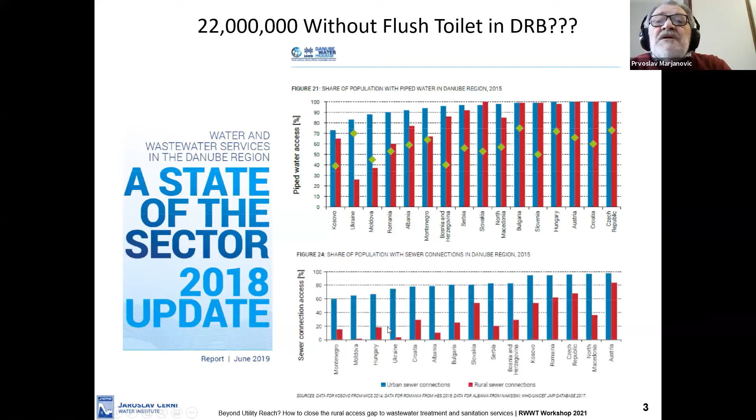That brings me to the second graph, which basically shows the disparity between urban and rural connections and really tells us where the gaps are in different countries with respect to rural population. And you see that in lower Danube countries, rural population is really lagging behind.

Anyway, this is a map of agglomerations by size in the Danube River Basin, and you see obviously that the majority of those that we could consider in the rural sector are in the range of 2,000 to 5,000 people, even though some of them may be urbanized slightly in the center of the communities and so on, but a large number of settlements or agglomerations could be classified as rural in character.

When I look at the latest available data on the percentage of generated load in agglomerations bigger than 2,000 inhabitants, population equivalents in the basin, which are not collected as per the Urban Wastewater Treatment Directive, they don't have sewerage systems. You see a striking difference between lower Danube countries and upper Danube countries.

More than 75% of these communities between 2,000 and 5,000 people are typically not connected to sewerage systems. Not to speak about agglomerations and settlements smaller than 2,000 people.

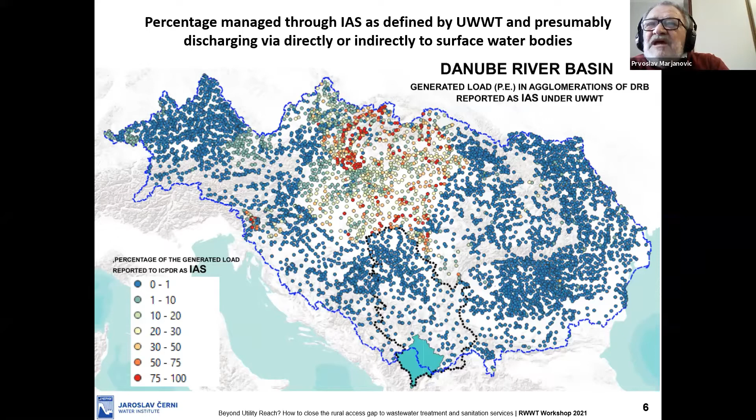If I look at the generated load in agglomerations which are reported as individual and appropriate systems, and the percentage of the generated load connected to those, again, you see that there are some differences, especially between Hungary and Slovakia. And I think probably the reason for these differences is in the way the individual systems are reported. I have a suspicion that some of the septic tanks are reported as IASs rather than as proper treatment individual systems.

If I look at unconnected or uncollected and IASs, you see the boundary, or the old Iron Curtain, if you want to use the analogy. And that's really the level of the development. And it's striking how big the problem is. So all these unconnected and IASs can be considered as individual systems to a large extent.

So the task to implement the directive, remember these are agglomerations bigger than 2,000, is enormous if we are going to connect all these people across the lower Danube.

If I now look at agglomerations bigger than 2,000, and the percentage of IASs which are discharging to soil rather than to the sewer system or the treatment plant by tracking the emptying of the systems to the appropriate treatment plant, you see again there is a large proportion of those communities, especially in the middle region, in Hungary, Serbia, Bosnia, Croatia, Moldavia, parts of Romania, which are actually discharging into the soil.

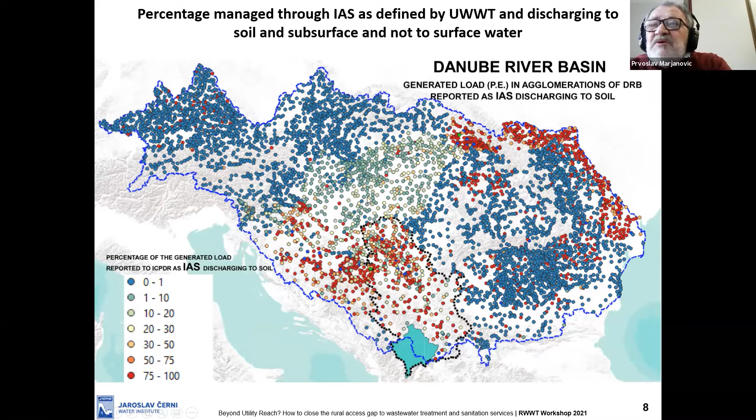Now, soil as a recipient of treated or untreated wastewater is not recognized by the Water Framework Directive or the Urban Wastewater Directive, which I think is a major problem. That again is pushing us in the direction of having to connect all these people to centralized systems or to discharge the wastewater into the water streams rather than avoiding it. If we do that, I think the impacts on the environment are going to be much bigger on the status of water than they are currently.

If I focus on Serbia, this is the distribution of settlements, not agglomerations, in the different size classes. And you see again that less than 2,000 is the majority, which we understand. 2,000 to 5,000 is a significant number. The rest is manageable easily by centralized systems, 5 to 10,000, 10 to 50, and so on. In Serbia, we have delineated 398 agglomerations, taking care of some 745 settlements bigger than 2,000.

Now, the major problem we have, as Konstantin mentioned yesterday, is depopulation. And if you look at the trend of the population in different class sizes, you see that the communities less than 5,000 people are all on a serious decline rate.

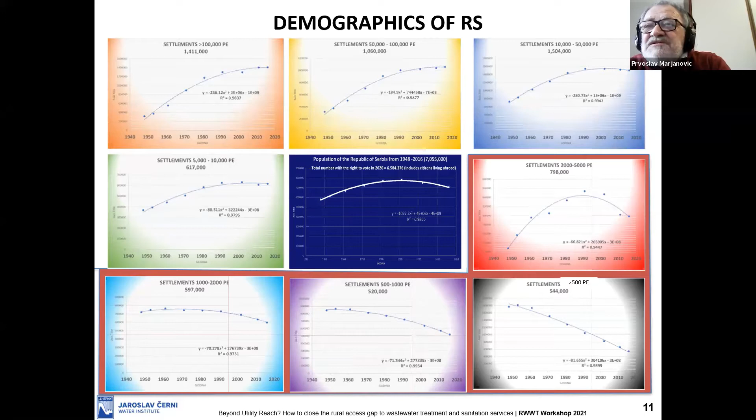The national population seems to be stabilizing or at the beginning of a declining trend in communities bigger than 5,000 people. So there is no question for those to go to centralized systems, but for those from 5,000 down, I would be very reluctant to go and design collective systems which will not serve the people who are disappearing in those communities.

When I look at what percentage of population in Serbia lives in different size classes, I see that the biggest chunk of people lives in communities between 10 and 50,000. But I also see that the percentage of population living in communities smaller than 5,000 is close to 40% of the total population. So we're talking about some 3.5 million people.

If I take Serbia as an example and look at the percentage of people in different settlements, not in agglomerations of different sizes, which are served by individual sewerage systems, and I include in individual systems even septic tanks and pit latrines, we're fully aware that they are not adequate treatment. You see that 95% or more on individual systems covers a large territory of Serbia and thousands of communities.

Now, when I look at the character of those communities, I see that the communities of less than 2,000 are typically rural. There are approximately 600,000 individual systems serving those rural communities. Mixed systems, those are 2,000 to 5,000 people, approximately 205,000 individual systems in place, and 325,000 individual systems in place in urban and peri-urban settlements, those bigger than 5,000 people.

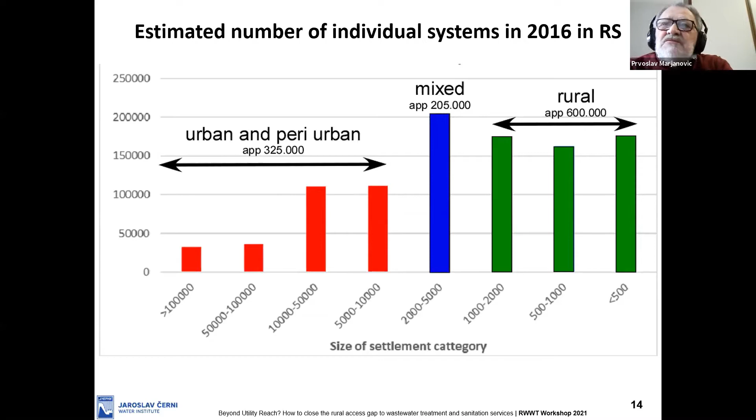Those in red should probably continue; we should push them to connect to the centralized wastewater treatment system, unless you give some exceptions for the outskirts of the cities. The blue and the greens, I think, do not merit collection systems and central wastewater treatment plants in my mind.

When I look at the current planning in Serbia, we are planning according to the detailed implementation plan for the Urban Wastewater Treatment Directive some 2.3 billion for construction of new sewers. That's assuming that everybody will be connected to the central system. 92% of investment in the network is for new sewer systems.

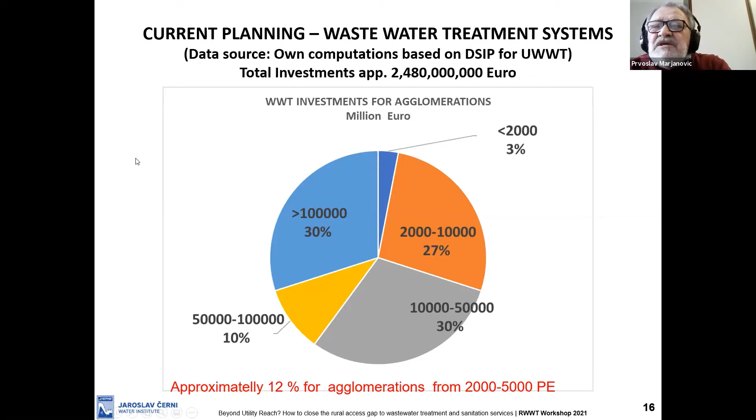If I look at wastewater treatment itself, I see that some 30% goes into medium-sized communities, the bigger proportion of the population. Some 30% goes to communities bigger than 100,000, but 27% goes into communities between 2,000 and 10,000 people, of which, when you split it for less than 5,000, you see about 12% of the investment going to wastewater treatment in communities of less than 5,000 people, assuming they all get connected to the sewer system.

Now, for the sake of the argument, I'm going to assume that we're going to stop building any new sewer systems, and all those that are not connected currently will go into individual systems in communities smaller than 5,000. And if I look at the potential for savings, the red ones will definitely stay centralized. The 5 to 10,000 will also largely stay centralized. The others will go to individual systems under that assumption, giving us a figure of about 1 million individual systems to be installed for the total population of Serbia, including those in settlements of more than 2,000 people, not only in agglomerations.

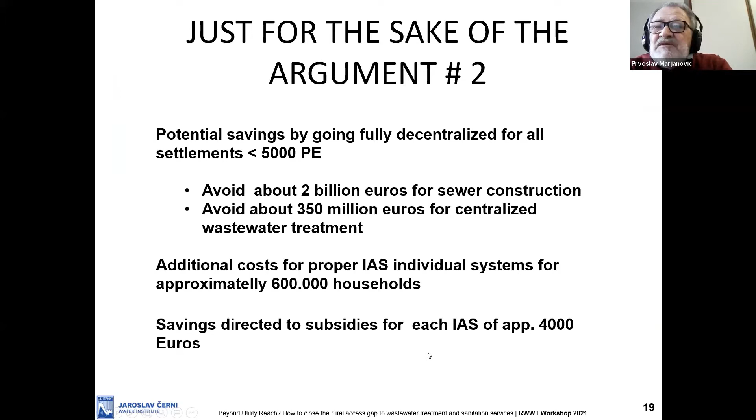Also, for the sake of the argument, if I assume those figures, then it's possible to save around 2 billion euros on the construction of new sewers and some 350 million euros for centralized wastewater treatment. These savings would allow us to consider subsidies for some 600,000 households at the level of approximately 4,000 euros per system to supplement the investment of the households in constructing proper and appropriate individual systems in those areas.

Is it feasible? According to the data we have insight into, absolutely. Typical costs in Belgium for an activated sludge plant or an equivalent do not exceed 1,000 euros per population equivalent. So for an average household of four people, you're talking about 4,000 euros to install an on-site treatment facility and discharge the treated water to soil without discharging to sewers. Similar costs in the United States are also documented and well prescribed.

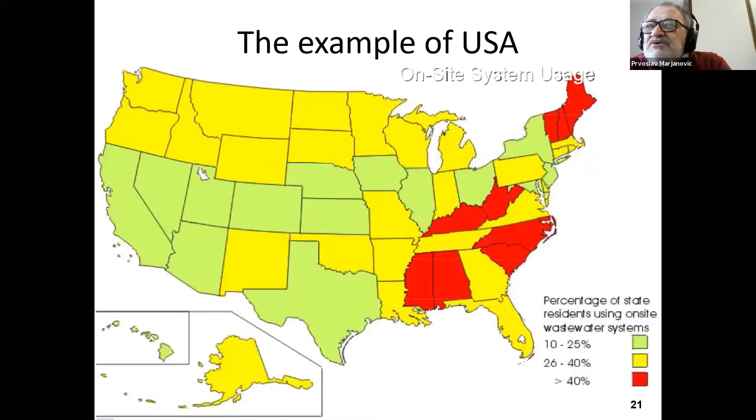If you look at the United States itself, and I would also urge people to consider the experience of Ireland, you see that the developed East Coast has many states with a large proportion on individual systems. If it's feasible for them, I don't see why it's not feasible for the lower Danube Basin.

And in closing remarks, I want to state that detailed analyses are obviously needed on all costs and benefits. There are many additional advantages which are possible and realistic by going with individual systems in smaller communities and rural communities especially, such as flexibility and mobilization of additional funding from the individual houses, because the subsidy program will not fund 100%. You can attract additional funds from the households to invest in their property. You can create a whole new industry for installing and maintaining those, create jobs, and so on. You just have to develop proper management models to do that.

The main problem is really not the technology, and I'm sure this will be addressed in the next session. The problem is really in the management of those systems, like Konstantin mentioned, that they don't have the capacity to manage these small systems. The problem of management is something to be considered very seriously, and different models for management are possible and can be considered.

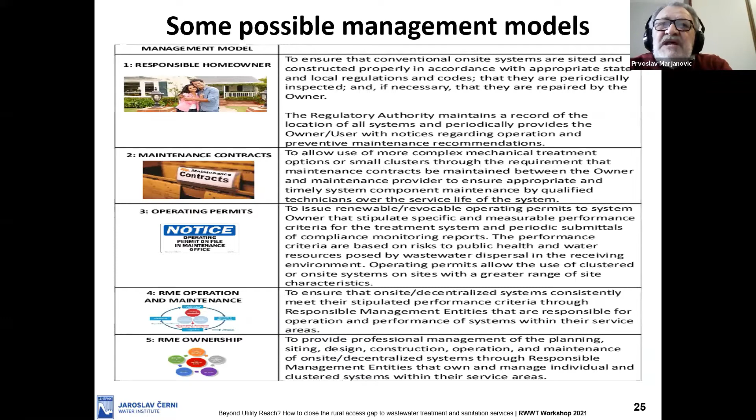The different management models that have been used in different places are varied, and I just mention 5 here from the United States. These different management models have different role players, from regulatory authority, service provider, owner, user, all the way to a responsible management entity, if you create such an agency in your country. The role of each particular role player in different phases of implementation of individual systems is clearly documented and can be implemented.

I think the requisite for this is an enabling legal framework from the EU and national governments, which I believe is currently not the case, even though Ireland has gone a long way toward providing this. People are advised to look at the case study of Ireland, especially in light of the court case they lost against the EU, and their subsequent changes to the Water Services Act, which now make it possible.

It's time to start thinking with an open mind and stop ignoring the potential of individual and appropriate systems because of difficult management issues that can be easily resolved. It's time to get soil recognized as a primary recipient of treated wastewater, and I think it's very pertinent and applicable to the Danube River Basin, especially the lower Danube, for communities and agglomerations smaller than 5,000 equivalents.

The real problem is that our experience with on-site treatment in the past has been bad. That doesn't mean the future has to be the same. Sewers are not really the sign of a modern civilization. Sometimes we have to question those approaches seriously.

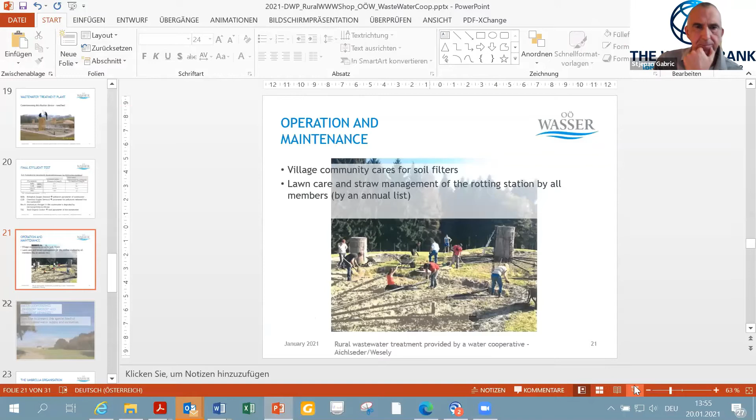Ladies and gentlemen, Stjepan, thank you very much for your introduction. I start my presentation. Just a moment, please.

So, yes, I talk about a report about rural wastewater treatment provided by a cooperative in Upper Austria. I made the presentation with the chairlady of the cooperative Dingdorf, Hermine Wesely.

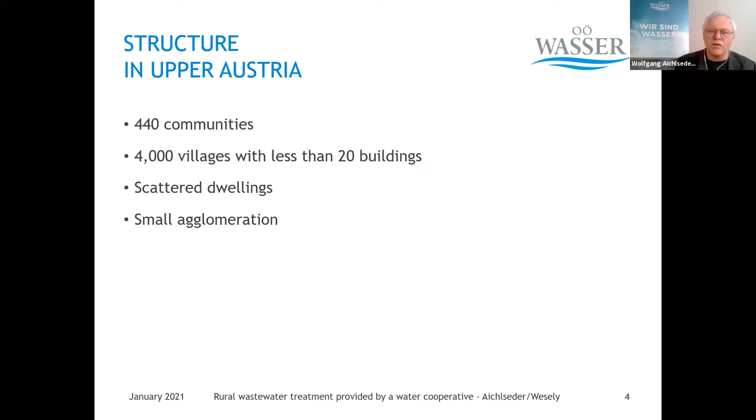Upper Austria, a state of the Republic of Austria, is in the northwestern part. We have a hilly region, and in the south we have mountains with narrow valleys. The structure is that we have 440 communities, but more than 4,000 villages with less than 20 dwellings. So we are a scattered and small agglomeration.

One of the solutions we support are water cooperatives. Water cooperatives are the user, owner, and responsible persons, and their principles are public cooperations referred to the Austrian law. They are also controlled by the authority, the local authority. They are self-determined and have personal responsibility for their organization.

One of the principles is also cost covering. The organization is such that all members have to pay to the costs. Water cooperatives, like communities, are financed by connection fees, basic charge and consumption charge for the operation. They also have the possibility to get subsidies from the state and from the Republic, and also credits and loans.

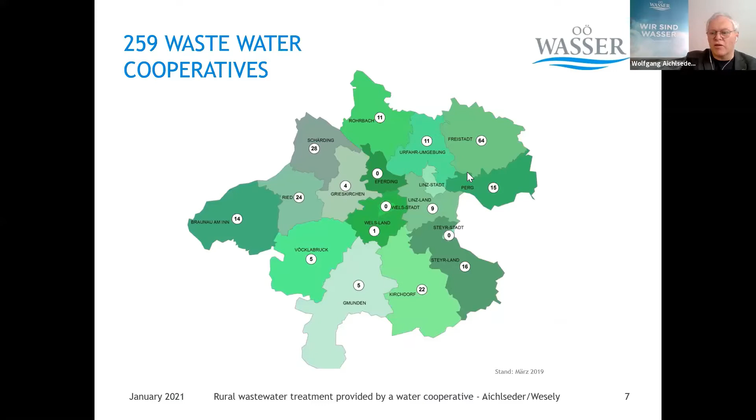In Upper Austria now we have about 260 cooperatives in the regions, and I think in all regions we have it, but most in the hilly side of the northern part of Upper Austria. The member structure is that small villages, up to 10 or up to 30 households, are a topic to organize cooperatives for wastewater management.

In Austria, we have more than 3,400 water cooperatives, but they also deal with water supply, irrigation, flood control and melioration. For me, it's a solution predominant in rural areas, in small villages, where they can get an organization with inhabitants from the village.

I'll show you an example, the water cooperative from Dingdorf, from the founding to the planning, designing, constructing, and operating a small sewage and wastewater treatment plant.

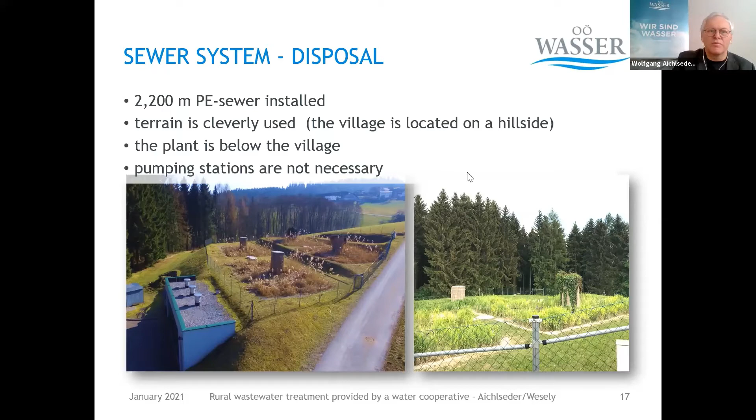The wastewater treatment plant was not a package plant, it was a reed bed filter system, first with a rotting station with straw, and then the wastewater comes to the reed bed filters, and after an inspection shaft, the effluent disposal goes to a small river, to a ditch.

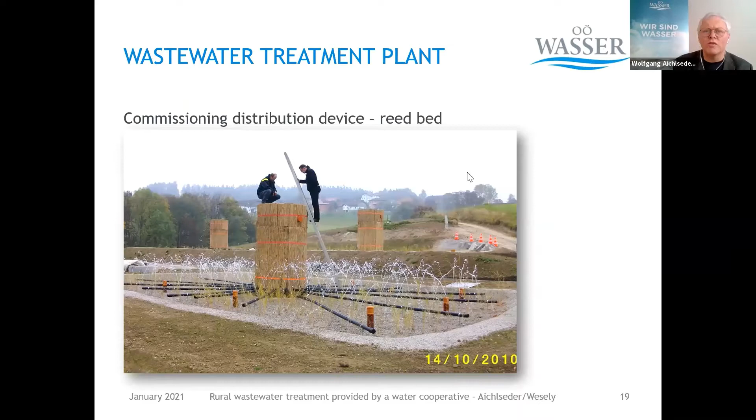Here you see a photo from controlling the distribution devices during the construction.

A cooperative belongs to their members, though the community of the village cares to operate the wastewater plant. They have an annual list, so straw management for the rotting stations is provided by the members. They also have a field to dispose of the rotting material, and now after 10 years of operation, there is enough place to dispose of the straw.

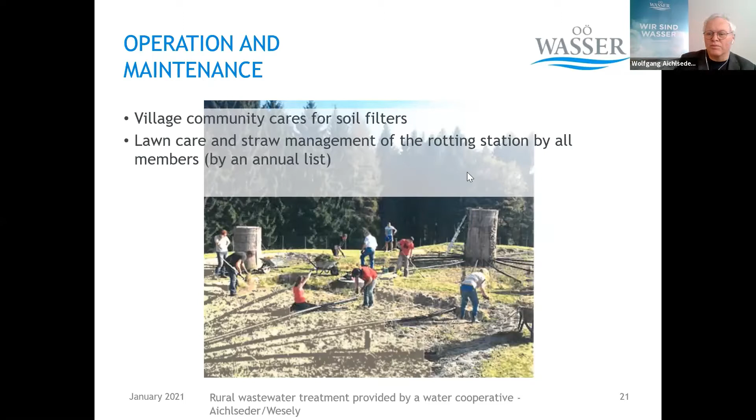The water cooperative was consulted by the umbrella organization, Upper Austrian Water. This organization was founded in 1946, a long time ago, by a resolution of the Upper Austrian Parliament. The general manager and office are financed by the Upper Austrian government. The main objectives are team working, speaking with one voice, pooling ideas from the members, and supporting interesting village foundations.

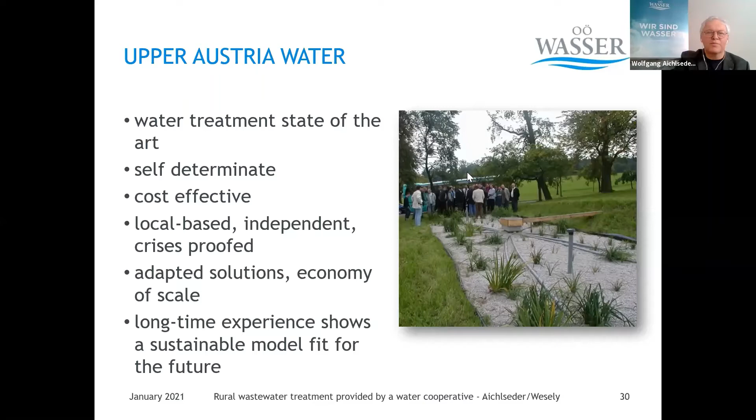Thank you, Wolfgang. Maybe a quick question before we move further: how unique is this form of association cooperative for Austria? Does it only exist in Upper Austria, this kind of umbrella organization, or does a similar organization exist in other parts of Austria?

Cooperatives exist in every part of Austria, mainly in Upper Austria, Salzburg for water supply, but also for wastewater in Styria. Umbrella organizations are in Salzburg and also in Styria and Burgenland. Nowadays there is discussion, and I'm consulting in Carinthia. We also have models in Ireland, Spain, Denmark, and Finland.

Our Upper Austrian model is copied in Uganda. In Uganda, they have 6 umbrella organizations for the whole country, and there, for example, they handle both water supply and sanitation together. The model is that the villages make both together.

Thank you. I think it's actually a very good model that could be replicated in many other parts of the region, not fully utilized. I would definitely advise people to explore it further on their own. We also have a possibility to ask additional questions during the Q&A session after the presentation.

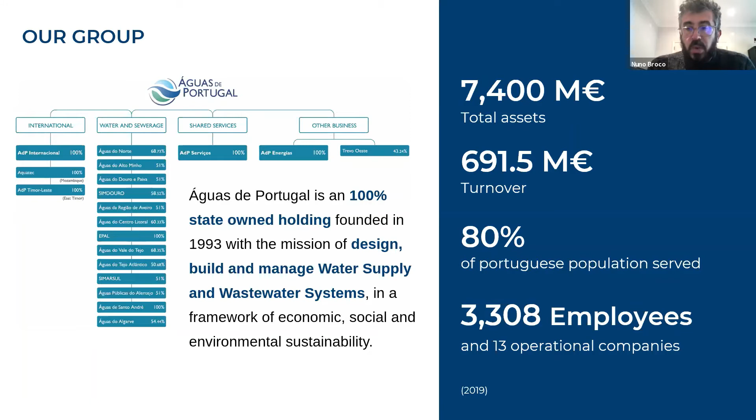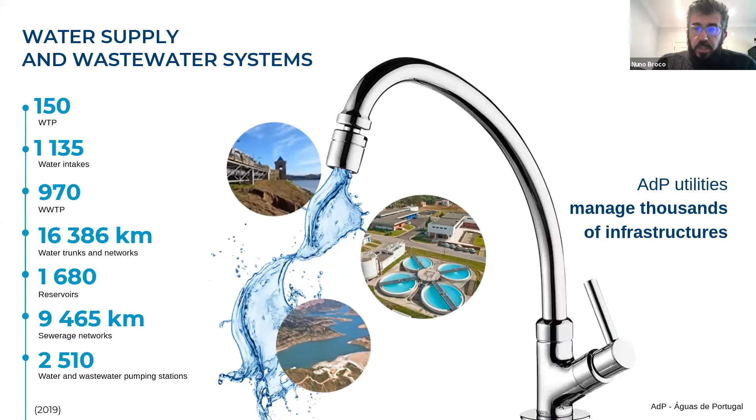And we serve around 80% of the national population. The remaining part is served by other operators that we have in Portugal, and we employ around 3,000 employees at this moment. We manage a huge number of assets, water and wastewater, mainly on the bulk part of the system. So the retail part of the water system is the responsibility of the municipalities for most of the areas where we are.

Like I told you before, we are a small country, only 10 million inhabitants, but the biggest part of our population is focused on the coastal area, and the other part, the rural area, is in the countryside. So we have a big challenge in terms of management of our assets. We have big plants in the coastal area and very, very small plants in the inland part of the country.

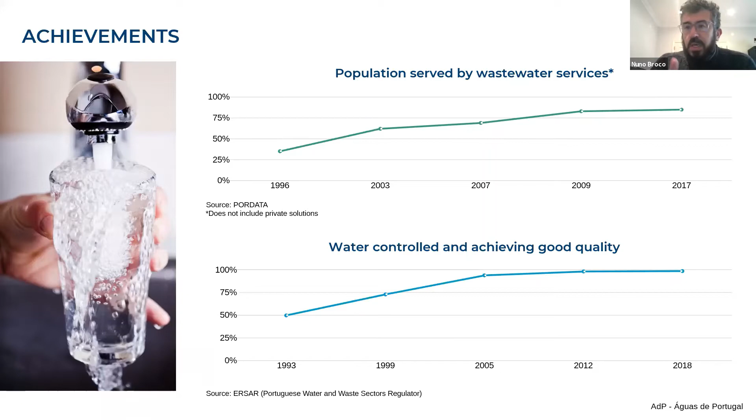During these 25 years, we have achieved important results in terms of sanitation and also in terms of safe water. And just to tell you that, although we have in the top graphic that only 80-something% of the population is served by wastewater service, this means central wastewater service. Some private solutions are not included in this graphic. So at this moment, Portugal has a coverage of service around 90-something%.

Well, how did we get here? It's important to share with you our story from the last 25 years. 25 years ago, Portugal had a very, very poor service in terms of wastewater and water supply. This service was under the responsibility of the municipalities. We have a very important number of small municipalities, and they are small, and there is some lack of capacity in their operations. So 25 years ago, only 15% of our wastewater was treated in proper wastewater systems.

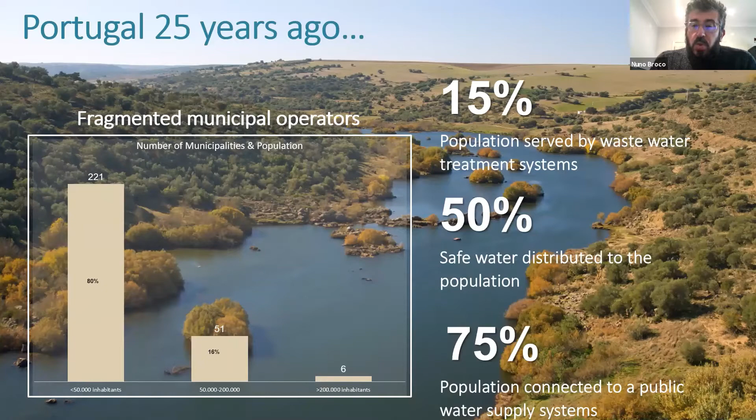Only 50% of the water distributed was safe, and only 75% of the population was connected to water supply systems. So at that moment, this was the big picture for the water sector in Portugal, with a huge infrastructure gap, low performance, low quality of service, very inefficient, with a talent deficit that was one of the major reasons for that, and that was not sustainable.

We had at that moment an exception, that was EPAL. It was the operator for the Lisbon area, for a set of municipalities around Lisbon. It was a very, very old company with more than 100 years. And that was the exception, and the Portuguese government took the decision in 1993 to use that example to create a new company, Águas de Portugal, and an institutional reform was needed to do that.

So at that moment, with Águas de Portugal, a new concept was created: multi-municipal systems. These were partnerships between the central government and the municipalities, public partnerships that operate with a concession contract. This contract includes a capital investment plan. We operate under a full cost recovery model, and we have a very, very powerful regulator at this moment in Portugal that regulates all these operations. So this was the framework in 1993.

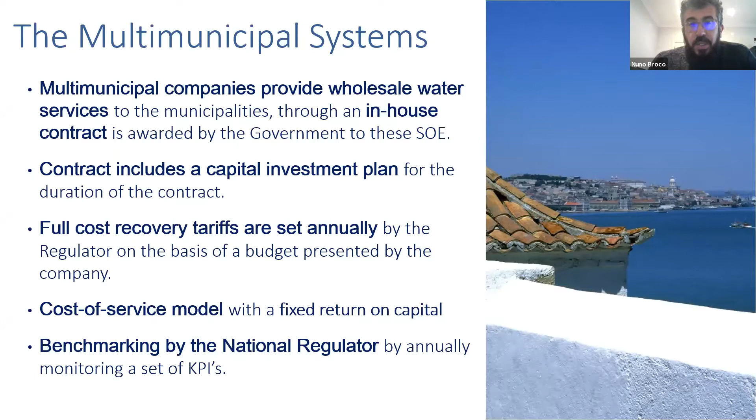At that moment, we focused our main attention on the coastal area. So we dedicated our investment plans to this first generation of multi-municipal systems, we created a set of new infrastructures, and we increased a lot the quality of service in this coastal area. The results that we achieved at the end of 1999 were very, very good, and the Portuguese government took the decision at that moment to expand this concept to other regions of the country.

So now we arrive at the main topic of this workshop. That was what we call the second generation of multi-municipal systems. But at that moment, some decisions were very important, because the model that we applied to the coastal area was not possible to apply to the inland part of the country, because we had a very low population density inland, low income from that population. The population was very old. Some desertification process was going on in the inland part of the country. We had a decreasing demography, and the topography of the inland part of the country was very different from the coastal area.

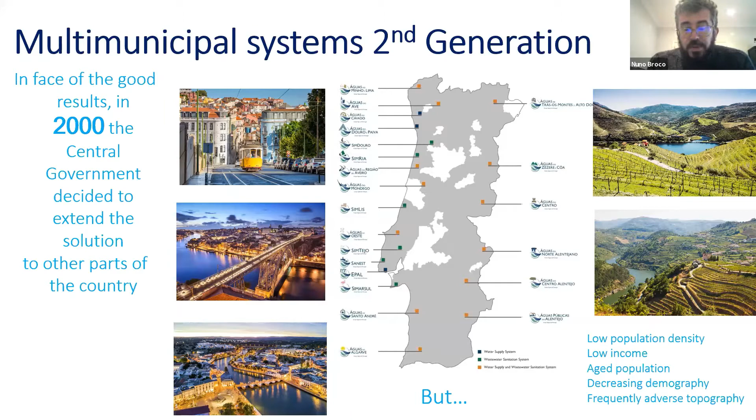So a different approach was needed to this second generation of multi-municipal systems. So at the moment, the main question was how to close the rural access gap to wastewater treatment and sanitation service. Like I told you, with a very difficult topography in the inland part of the country, we found out that we need to build around 500 wastewater treatment plants in this part of the country.

The largest part of them were below 2,000 inhabitants. These 500 wastewater treatment plants only serve around 6% of the national population and represent around 20% of our global investment. So this was a huge challenge at that moment.

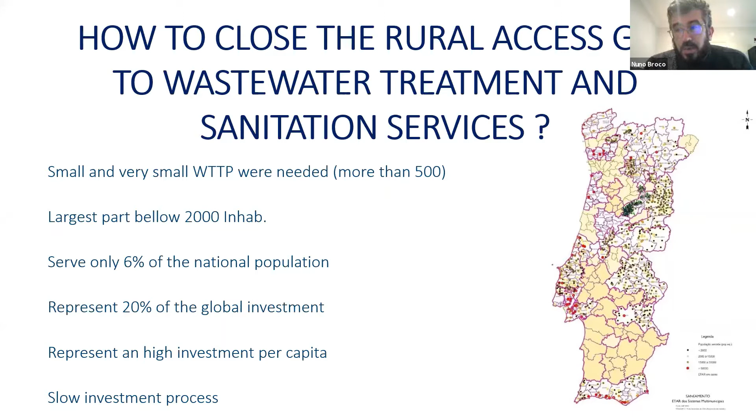In this picture, you can see these numbers, and like I told you before, the total number of wastewater treatment plants that we have below 2,000 inhabitants is around 70% of our total number. But we only serve around 6% of the national population with that, and this brings us to the investment per capita that is very, very high when compared with large wastewater treatment plants.

So that was the issue at the moment, and we had some goals in terms of the investment plan. We had the goal to make a standardization of these wastewater treatment plants, mainly because we wanted to minimize the project and tendering time. We knew at that moment that CapEx and OpEx optimization were crucial for the success of these operations. And of course, we had the full compliance of legal discharge limits. And one of the concerns was the operation of this huge number of systems.

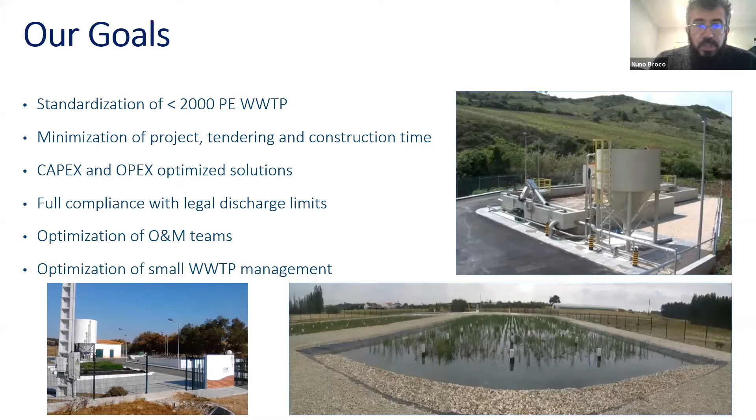So our approach at that moment, in the beginning of 2000, was to define a set of global solutions. We have pre-engineered a set of solutions for these small decentralized wastewater treatment plants. We have introduced that in a decision support system software, and this software gives us back all the price lists, drawings, project specifications, and tender documents. So this was indeed one way to speed up our investment plan, with the second goal of having new assets with controlled operation and maintenance costs.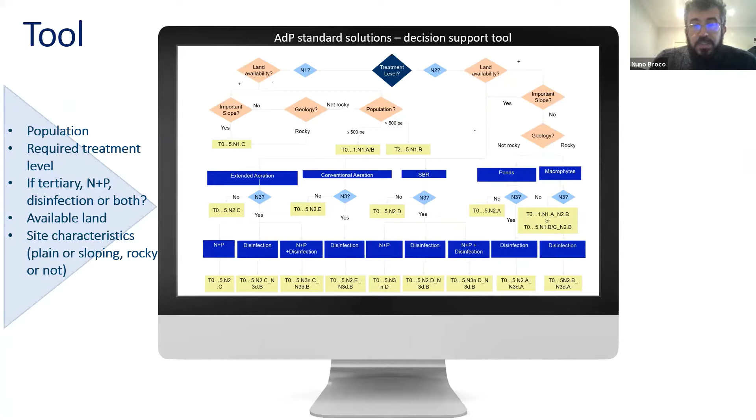So this is an example of our tool. It's a very, very simple tool, because the pre-engineering has already been done. We introduce the population, the required treatment, the available land, and the site characteristics. We have a decision tree in this software, and we have this standardization for a range of dimensions of these small wastewater treatment plants, from 250 inhabitants to 2,000 inhabitants. With different requirements of treatment, we reach the final treatment line. So this is the input of the system.

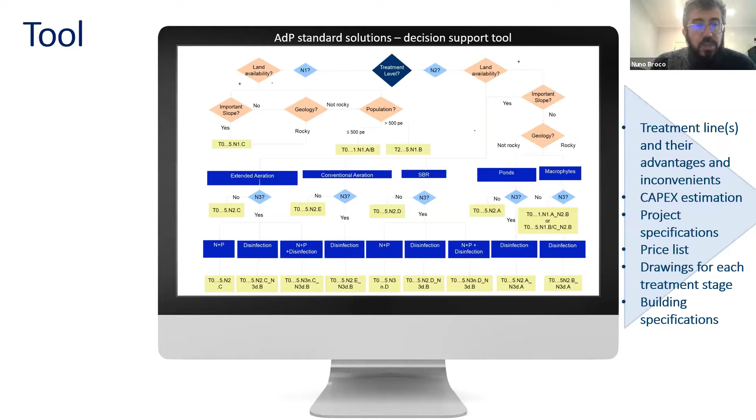So, just to resume, with this approach, during this decade from 2000, we have made this pre-engineering of all our solutions. We have built more than 500 wastewater treatment plants, and we tender according to public law in Portugal, which is not always very, very fast. We have made this standardization of solutions, and we have made this optimization of CapEx and OpEx. That was for us also very, very important.

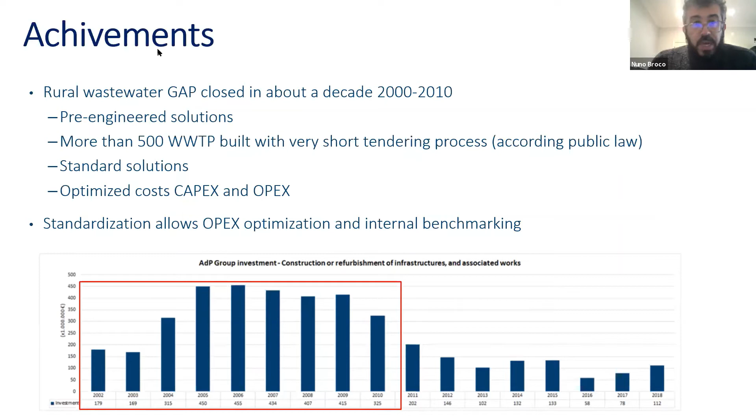Now, to conclude, we have been operating these systems for 15 years, some of them 20 years, and we have some modifications in the context that are bringing us to a new stage of our engineering. Rural population keeps decreasing in these areas. Some we built for 500 inhabitants, and now we have 200. We now have new technologies available. Most of these plants are already 20 years old, so we have some aged infrastructures, and a set of new challenges inside the ADP group: energy neutrality, circular economy, digitalization, and others. And we have this return of experience from 15 years of operation.

So we are now doing a re-engineering of these systems. We are now looking at these systems, and we will take some decisions in the near future about their rehabilitation. Some of them we will improve the capacity, some of them we will transform into pumping stations. So now we are in the second moment of the life of these small systems.

I have to admit that there was a World Bank study tour to Portugal 2 or 3 years ago, and we went there, and we knew that Portugal has this Portugal Waters state-run organization. And admittedly, coming from Eastern Europe, I was skeptical. I was like, okay, state-operated agency, it isn't going to work. And I was pleasantly surprised. I mean, the thing seems to work. The plants are constructed, operating, cost recovery seems to be there, etc.

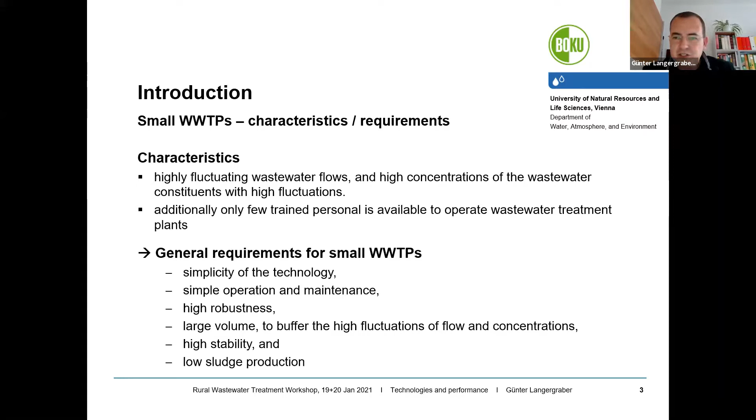I'm happy that I can again present you a little bit of what we have done in the recent years. We talked about, do these small systems work, do these small treatment plants work, and it's a kind of introduction to the other 2 talks. So a kind of overview, I showed this slide also at the introductory lecture, just reminding you where to start, and what Stipe also said, we are looking for technologies that are simple and easy to operate and show a high robustness. So which technologies basically do we have in the portfolio?

So we have these intensive treatment systems that are more the technical systems. We have technologies that have a fixed biomass and with suspended biomass. I'm not going into detail here. I'm quite sure you all know about these different things. We mentioned also these extensive treatment systems like treatment wetlands. I prefer the word treatment wetlands rather than constructed wetlands, because constructed wetlands can be constructed for other purposes than treating wastewater. So the preference is a little bit different, but it's the same as Stipe mentioned, treatment wetlands as one of these opportunities for extensive systems.

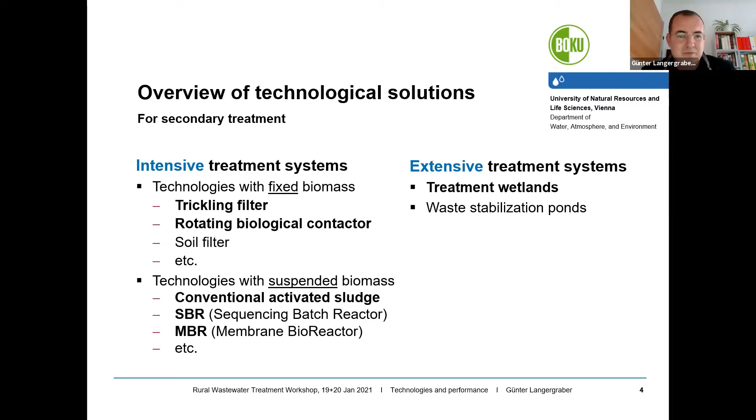What we heard before, we also have other systems. We have the possibility of collecting the waste on site and transporting it to off-site treatment. That's for sure one of the most expensive solutions. We talked about septic tanks in the previous systems, that's only primary treatment. And we talked about soil as a recipient of treated wastewater or partly treated or untreated wastewater. And there are also a lot of technologies that can save this. But I'm focusing on the systems for secondary treatment, and specifically on the treatment systems below 50 people connected.

What we heard also yesterday from Heide Müller-Rechberger about the capacity of the treatment plants in Austria, about 22 million people design load in the plants larger than 50 people connected, but we have about 1%, about 260,000 people connected to these treatment plants below 50 people. So it is about these 27,000 smaller treatment systems.

I will also take you now to Upper Austria, just to come back where Wolfgang started. We had a study. Upper Austria is quite well organized in collecting the data also from the small systems. They have quite well organized data, and we mentioned this external monitoring that's required. In Upper Austria it's required once a year, and the reports have to be sent to the government, to the authorities, and they manage to put the results from this external monitoring in the database. But no one has looked at this data yet. So basically they have the data from all the treatment systems, how they are performing. Once a year they have a measurement point.

So we got this measured data set for a 10-year period, from 2009 to 2018, for these treatment plants below 50 people. We looked at how the different technologies were performing based on this data from the external monitoring. And here you see the different technologies we compared: conventional activated sludge, SBR, vertical flow wetlands, trickling filters, RBCs, MBRs, and soil filters. This is a specific technology also.

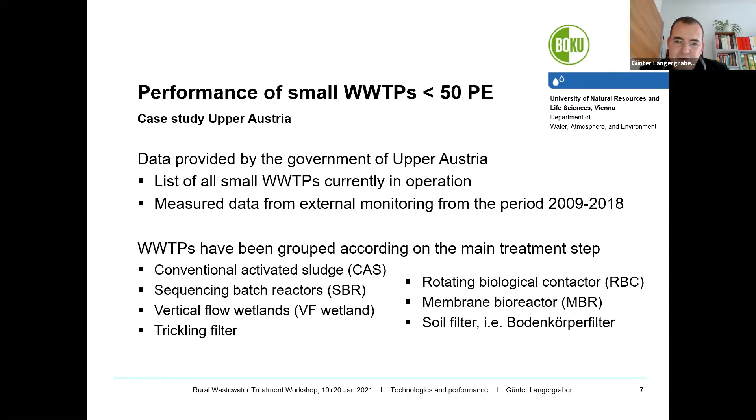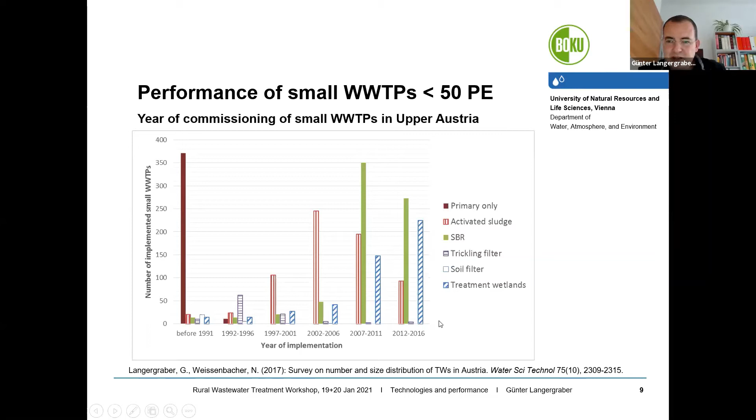What's quite interesting is the evolution of the different technologies. At the beginning, you see trickling filters in the 1990s were the first small plants implemented. Then the red bar, it's the conventional activated sludge. And then SBR technology was coming up, and in the last decade, it's mainly SBR plants and treatment wetlands that are implemented for these small systems. The data set we got now for this study is 3 years later, so about 130 plants more. The number of septic tanks is decreasing because the authorities try to get them replaced by systems, and you see SBR plants and wetlands are the ones that have been built in the last 3 years.

So as we look to the treatment performance, we have to distinguish also the single stage systems, let's say where we only have a SBR plant, but a lot of times we have a technical system and the treatment wetland as polishing stage. This is specifically needed for SBR plants, small SBR plants, because they have this intermittent discharge of the treated wastewater, and we have these small receiving waters, so to mainly reduce the hydraulic load, the flush load to the small receiving waters.

So you see about 1/3 of the SBR plants have a vertical flow bed, and also about 10% of the conventional activated sludge plants. For these plants, it's mainly further reduction of the solids load in the effluent.

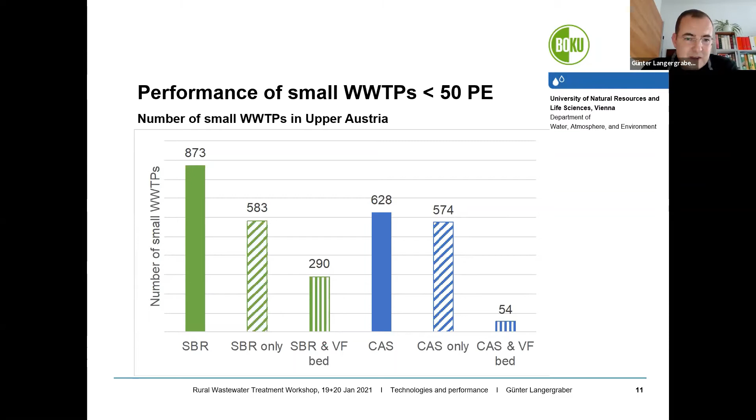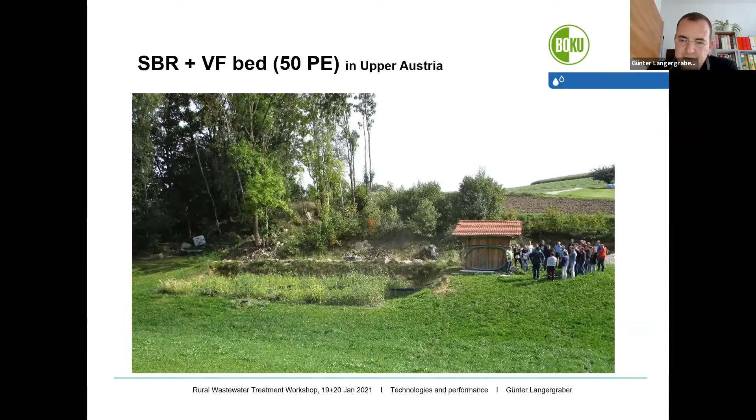And when we look at the performance of the systems, you see on average you have about 30 milligrams per liter effluent concentration of COD, and all the systems where you have a wetland bed perform better than the others. So also a single stage treatment wetland, and also those with the additional polishing stage, show lower effluent concentration, but also the exceedance of the threshold is in number and percentage lower than the average for this system.

A similar picture you can see for ammonium nitrogen. In Austria, all treatment plants have to nitrify. I think that has been mentioned also before. This is the most sensitive parameter, where we see more often violation of the thresholds, but also here the average or the median values of the effluent concentration are very low, and lower again with these systems that have vertical flow beds included.

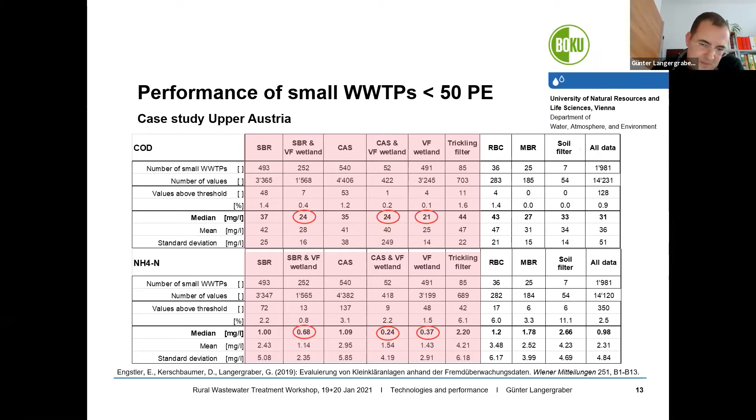Also the other technologies, all technologies actually performed well, but more stable performance has been shown by the systems where wetlands have been included. The final picture here is comparing, for example, conventional activated sludge plants and those that have a wetland stage afterwards. So they show a similar performance, again, all the systems with these vertical flow beds. The number of plants for each data point is different here. It's not showing the details, but in general gives you a good picture.

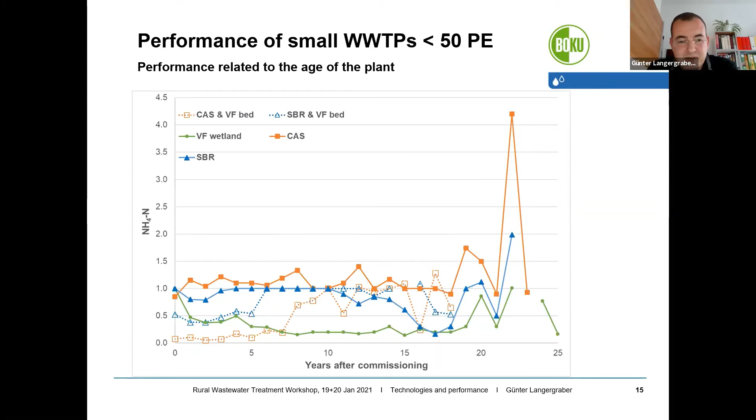One thing was, at the beginning, we were thinking, does it work with data from external monitoring? We had data in this data set where the effluent concentrations were way beyond the discharge limits. And also to say, maybe it's because in Upper Austria the system with this training is very well managed by the authorities, so people do these training courses. So there are most likely more trained people running these systems than maybe in other countries. So we couldn't see basically any decrease of the performance regardless of the technology. That was basically a surprise, that all technologies, even those that have worked for a longer time, worked quite well.

So what would be possible other solutions that have not been mentioned yet? I just want to give you a little bit more ideas at the end. We could think about, and that's now a trend in the last 15, maybe 20 years, wastewater as a resource. So these resources could be treated wastewater, nutrients, organic matter. There's a typo, I'm sorry for this. It could be also the heat in the wastewater that we can look at as a resource.

These solutions maybe most likely start with separate collection of the wastewater streams that we are producing. So separate collection of black water and gray water is not so much fancy, but gray water is less polluted and could be a good opportunity for starting to reuse treated gray water. Maybe you can use simpler technologies for treating gray water to get to the level that's required for reuse. We could also look at source separated urine, and production of fertilizers.

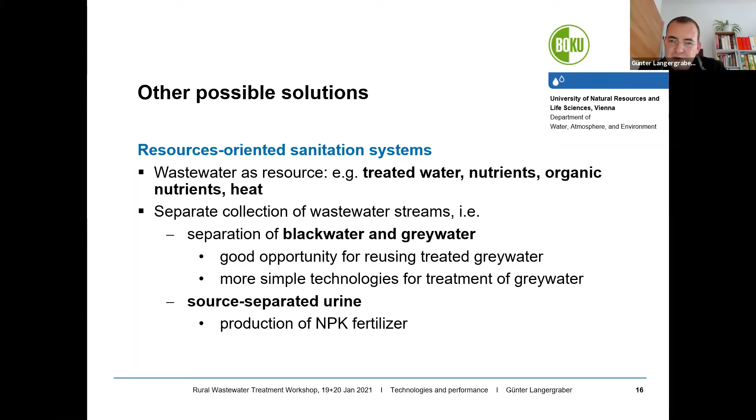So why would these systems also be of interest? Because experience from various countries where such systems have been implemented has shown that treating wastewater is often not incentive enough for the owners of treatment systems to operate them well. But if there is an additional benefit, for example, that the treated wastewater is used for toilet flushing or irrigation, then the incentive for operating and managing your system well is higher.

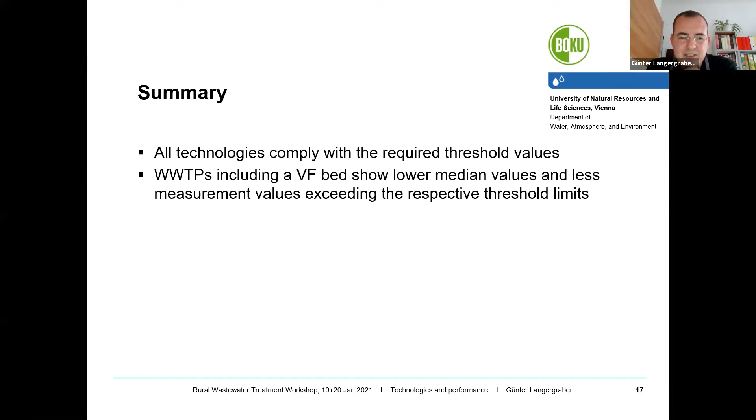So just to sum up quickly, what we found is that despite the technologies all being able to comply with the required threshold values, if you have treatment wetlands included, either as the main treatment stage or as a polishing stage, these systems have performed slightly better. We couldn't find changes in the treatment performance over time. And again, as I mentioned yesterday, proper operation, monitoring and maintenance seems to be a key factor for well-functioning small systems, and these resources-oriented sanitation solutions can facilitate the well-functioning of the system as well.

With this, I would stop and give the word back to Stipe.

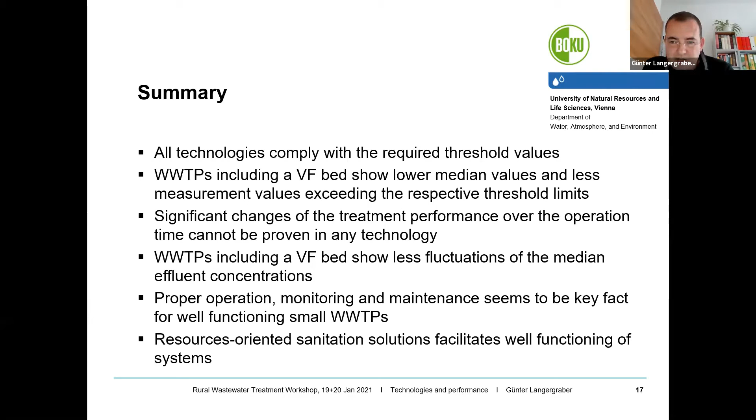Thank you, Günter. Basically, very good presentation. One can tell that you are a university professor, how well your presentations are structured, how orderly they are presented. So, congratulations. This kind of summary immediately takes me to the second issue, basically the financial sustainability of wastewater treatment, which is not the topic for this session. The topic of this session is technology. We'll look at this issue of the financial sustainability of wastewater management more closely in our next workshop, hopefully sometime in spring.

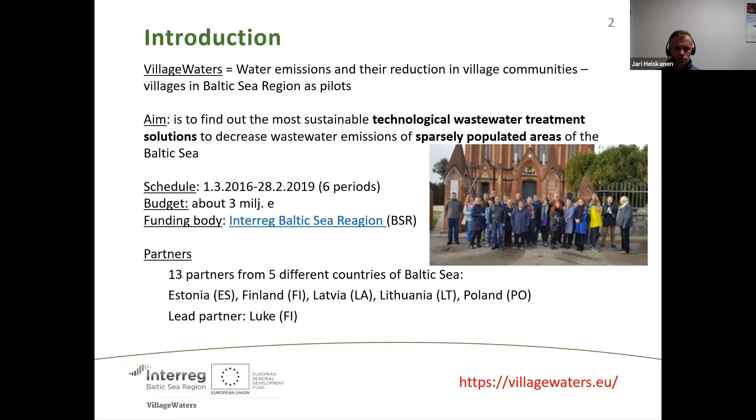So what we did in our project: we had 9 small-scale wastewater treatment plants, meaning 1 or 2 in each partner country. We either renovated an old wastewater treatment plant or replaced it with a totally new one. We made water analysis before and after renovation, from influent and effluent water. Another output was an information tool, a web-based tool in 7 languages, the partner languages plus Swedish and English, available on the villagewaters.eu pages.

The idea of the tool is to find a suitable treatment solution for each case, so every target group can check and find the best solution. We collected data on more than 500 small-scale wastewater treatment systems from suppliers of the systems. Then we produced research articles, and guidelines and instructions for target groups and users.

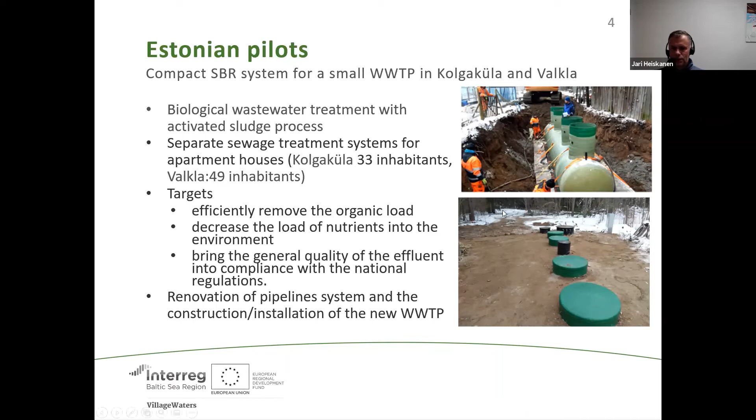Here is the technical scheme, just briefly: there were 3 tanks - equalizing tank, process tank, and sludge thickening tank - and ferrous sulfate was dosed as a coagulant agent into the process tank.

In both cases, the inflow was less than 10 cubic meters per day, and we used around 20 liters of ferrous sulfate.

What about the cost? Total cost in Valkla was 35,000 euros, and in Kolgaküla 43,000 euros.

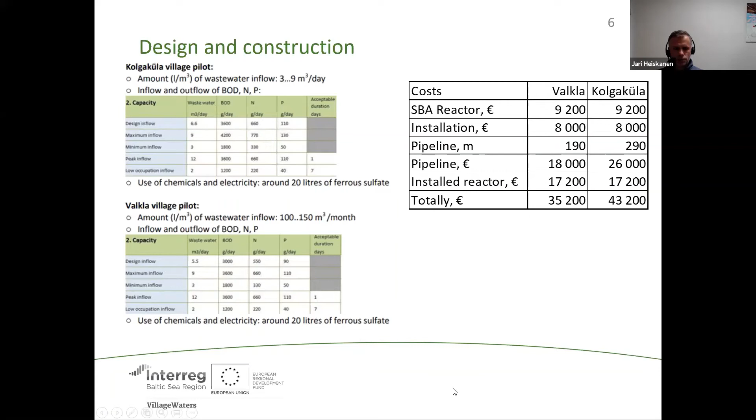And results: in the testing time, we had a very big variety of inflow, as you can see, BOD from 200 to 900. So also the output variety was very large. But at the end of the test, in the normal run, we did meet the requirements like BOD 40 and suspended solids less than 35 milligrams per liter.

For small plants, there are no requirements for phosphorus or nitrogen, but if we compare to HELCOM, Helsinki Commission recommendation for the Baltic Sea region, we can see phosphorus 2 and nitrogen 35. So we did meet those requirements.

Means in normal flow, at least in summertime and springtime. In Lithuania, in Leitgiriai, we had a bioreactor with air blowers and an excess sludge tank. So biological treatment has anaerobic, anoxic, aeration, and clarification chambers in one tank. Here are the pictures from construction time when we visited there.

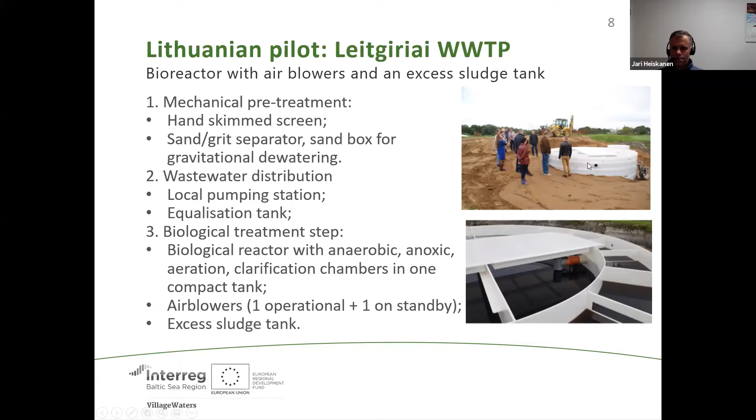Design flow was for 163 PE and average flow about 26 cubic meters per day. And here are the design treatment efficiencies.

In Finland, we had 2 pilots. One pilot was a private household with 4 people, and it includes 4 septic tanks and a filtering bed. In that case, we also renovated the old one and installed a new sand filtration layer to remove phosphorus more efficiently. We also needed to add another pump, or actually this was done by the person living there.

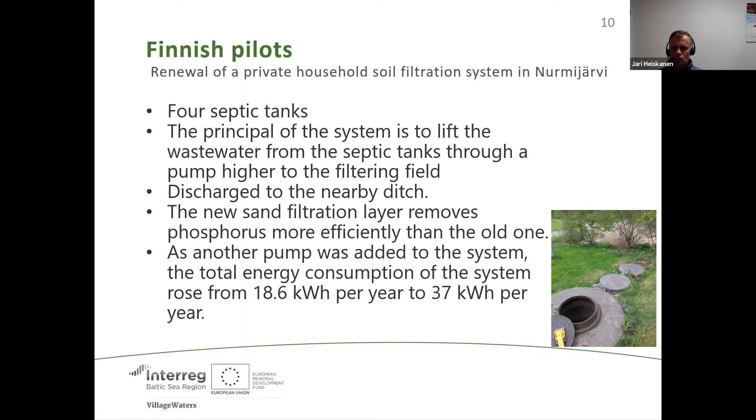And here are the results: very good results with phosphorus 97%, nitrogen 78%, BOD 38%, and this system cost about 8,000 euros.

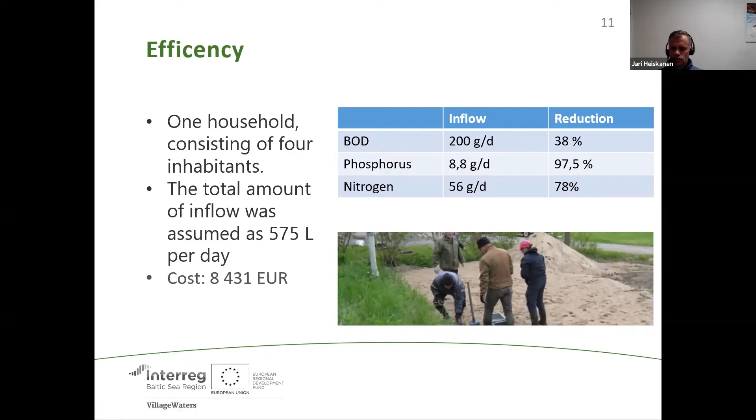And just shortly about the other pilot in Finland, Järvenpää Lake: there were about 10 houses near the lake, and we installed a new pumping station and pipes there, but it was actually connected to the municipal wastewater treatment network because it was thought that would be the better solution there. The work was done by a water cooperative there.

In Poland, we had also 2 pilots. In the mountain side, in Tulic, we have a soil filter and then an irrigation ditch. And in Sokoly, also a soil filter and an irrigation pond, as you can see in the picture. This was done for 1 elementary school, actually.

And in Latvia, 2 pilots similar to Estonia. Yeah, that was about the pilots, and then another output we did.

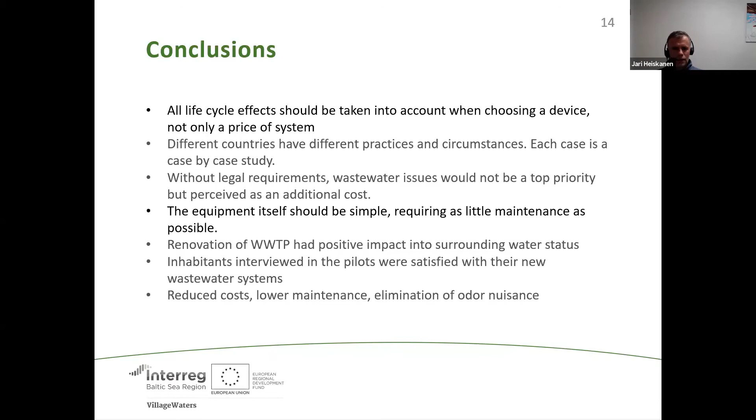One is basically about the cost of operation and maintenance. You show in your tool that there are costs, but are those only capital cost of investment, or also cost of maintenance? In this tool, cost of maintenance should be separate somewhere. There is the investment cost, but this is actually calculated, for example, for 30 years. And this tool is publicly available, I mean, I haven't checked on the internet.

Yeah, that is available. Of course, the problem is that with many projects, at the moment nobody maintains it. We used to maintain it during the project and a little bit after, but the equipment changes. But at this moment, any of our participants that want to test the model can do it at the Village Waters site, I guess. Yes, and it is also in English.

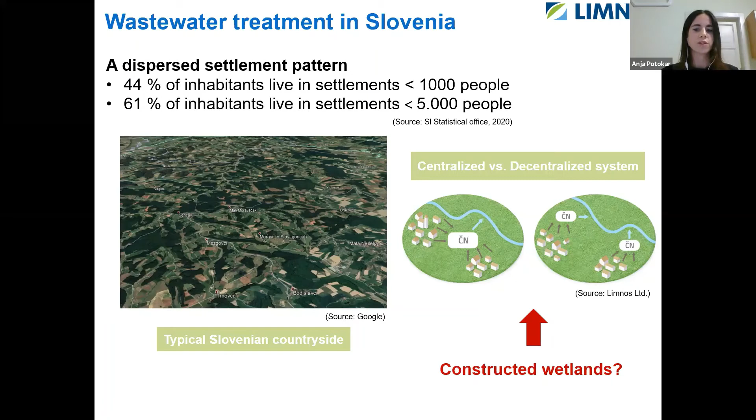Currently, our biggest wastewater challenge are agglomerations below 2000 PE and areas outside the agglomerations. In Slovenia, more than 44% of inhabitants live in settlements with population of less than 1,000 people. That means we have many small villages scattered throughout rural areas on small mountain hills, and this dispersed settlement pattern makes decision-making even more complex, time-consuming, and solutions can be much more expensive. Centralized systems require intensive treatment systems which are technologically complex and financially expensive, and many small communities cannot afford the construction and operation of centralized systems. For these communities, nature-based solutions seem to be appropriate.

So what is a constructed wetland? It's a type of small wastewater treatment plant - a biological treatment plant with attached biomass. That means wastewater is treated by microorganisms attached to the gravel and to the roots of plants. Its operation is based on imitating nature's self-cleaning capacity. While many people think plants are the main element of treatment, they do contribute - they bring oxygen into the system, maintain hydraulic conductivity, and can even uptake some pollutants - but mainly they provide surface area for the attached microbial growth. So we say microorganisms are the main element of the treatment.

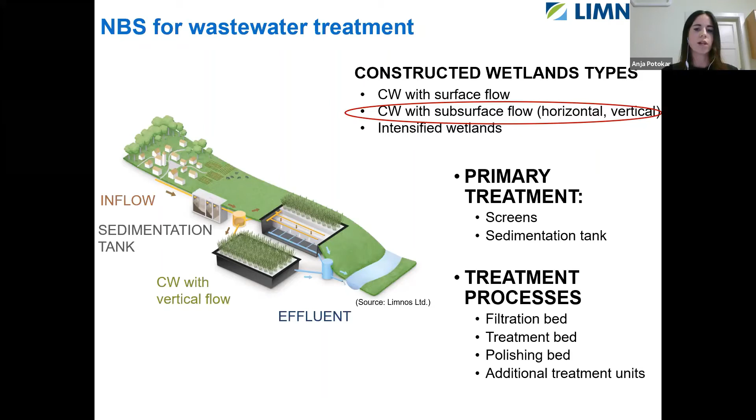Most constructed wetlands built in Europe are subsurface flow wetlands, and these are also most commonly built in Slovenia. We used to build horizontal flow wetlands, but now we are mostly building vertical or hybrid systems. What are the typical treatment steps? First, primary treatment, which contains coarse screens and a sedimentation tank. Then pre-treated water goes into the constructed wetland beds, which are isolated with foil, filled with substrate and planted. Each bed is designed with a specific role - to filter, to treat, or to polish wastewater.

What are the advantages of constructed wetlands? As mentioned before, low cost of operation and maintenance, especially if we compare with costs of conventional technology. It is passive technology. That means that typically no or very little electricity and machine elements are needed for the operation. The construction is very simple and easy. It can be done by local companies. I will also show some pictures later in the presentation.

And the systems have a high buffer capacity. They can adapt to fluctuation in pollutant concentrations and hydraulic loadings. Thus, these solutions are also appropriate for vacation homes or touristic areas.

So what are constructed wetlands' disadvantages? Well, they need a relatively larger land area than conventional wastewater treatment. Here in Slovenia, we're using around 2 square meters per population equivalent. But if we intensify systems, like if we aerate them, we can even lower the required area.

The system can become clogged due to wrong selection of substrate or poor construction and maintenance. And it's also harder to control the treatment process because once the system is built, it can only be adjusted to a small extent. So the first constructed wetland in Slovenia was built in 1991 and is still in operation.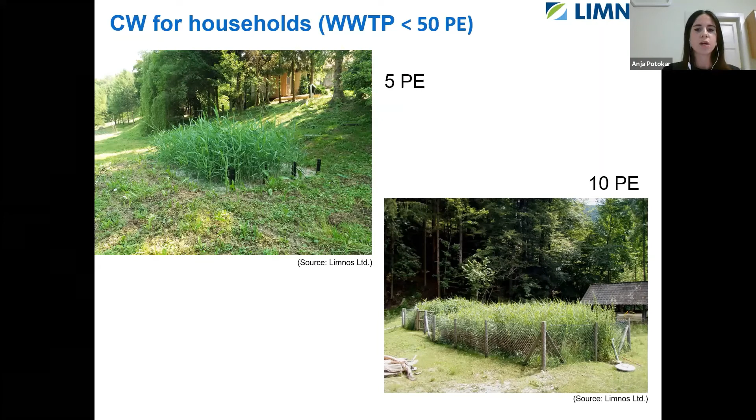And then another good practice of collaboration between municipality and local community: in this specific case, the initiative came from the local community Kamenica. Kamenica is a small village. It has around 10 to 15 houses.

And they're not obliged by the legislation to build a sewage system and a treatment plant, but anyway, they decided they want it. So they contacted the municipality, and the municipality supported their initiative. They donated to them some shafts and pipes, and the local community did the construction works and paid for project documentation. So they decided for a constructed wetland, which is working fine.

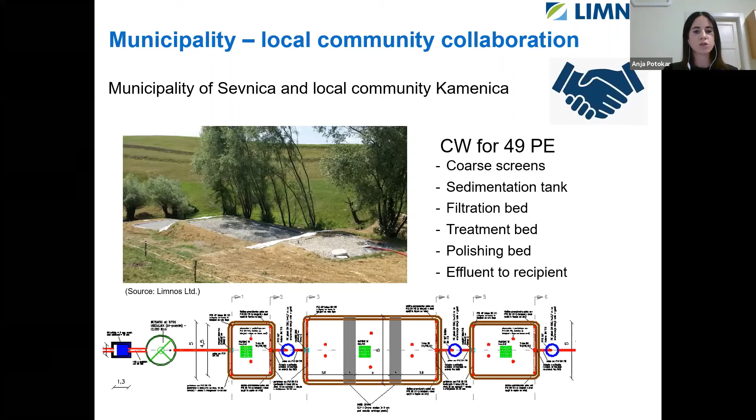So these kinds of systems can also treat industrial wastewaters. Usually we have to combine the technology with some advanced pre-treatment. Here you can see one for the food processing industry.

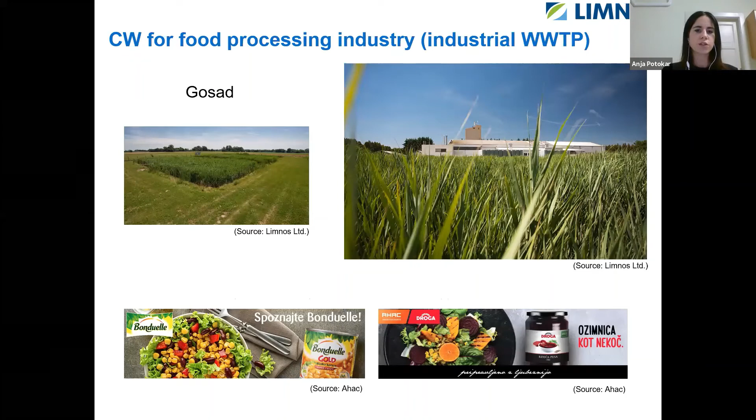As said before, constructed wetlands can also treat landfill leachate. They're a proven technology; they can be used even as a pre-treatment step before the irrigation of the landfill cover, or as a final polishing step. On the picture above, you can see the constructed wetland as a polishing step. It contributes around 10 to 20% to the treatment.

And the picture below is in Albania. The constructed wetland is implemented to treat old landfill leachate. It's a lagoon system.

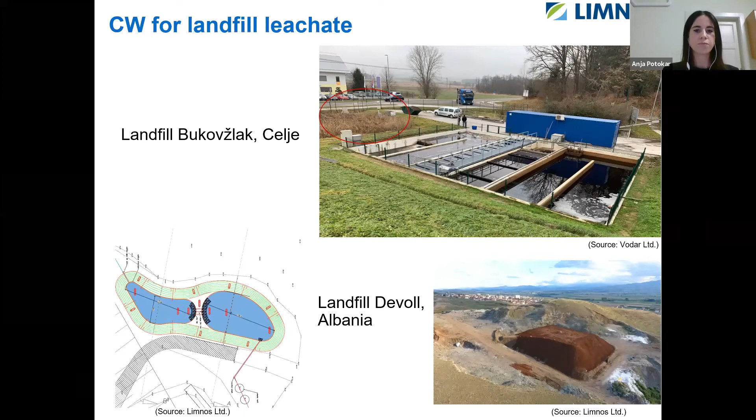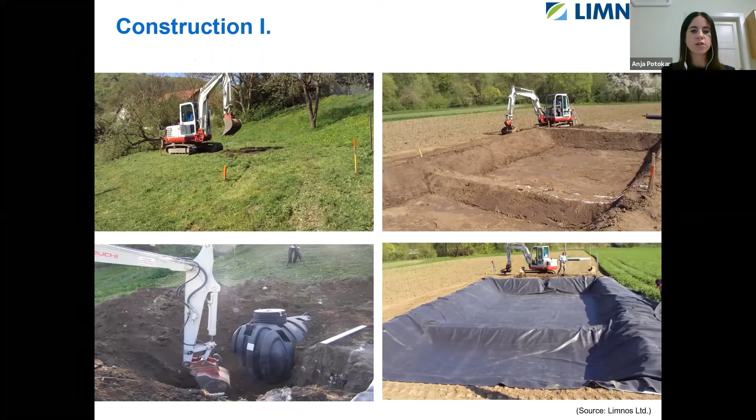So what does construction look like? Here we can see construction of one small constructed wetland. First excavation works, followed by installation of the sedimentation tank for primary treatment, and we ensure water tightness of the bed with foil, and we put in some geotextile to prevent foil damage. In the next phase, we install gravel, piping, manholes also, and we plant the beds. So as you see, it's very simple.

Yeah, so regular maintenance is very important for proper operation and efficiency of the system. The most important thing is to regularly desludge the sedimentation tank. Then we recommend weekly visual inspections to check if the system is operating as it should. And we also have to cut the reeds once per year in autumn, and plants don't need to be replanted. Of course, if we have some pumps, we have to maintain them and replace them as in any other system.

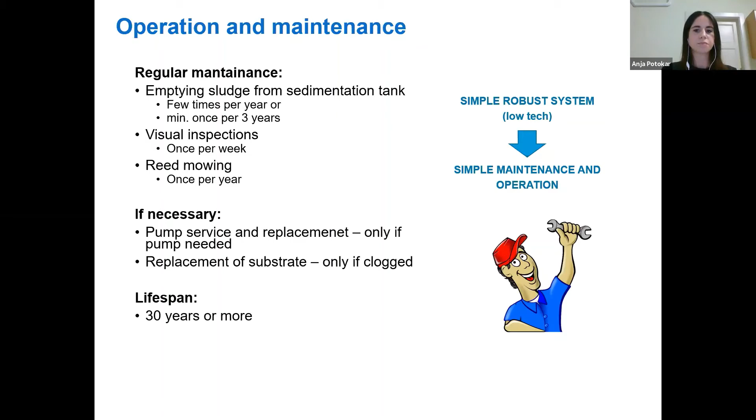So other nature-based solutions are reed beds for sludge treatment. I mentioned them before in Croatia. Well, sludge drying reed beds enable sludge dewatering, stabilization, mineralization, and they can be an alternative to mechanical treatment, for example belt presses and centrifuges. They're usually installed to overcome some sludge disposal problems, for example, to avoid expensive transport to the central wastewater treatment plant, or if the municipality wants to reuse the sludge. So here the sludge reduction relies on natural processes.

And what are the advantages of these kinds of systems? The final product contains from 25 to 40% of dry matter, while classical mechanical dewatering usually reaches around 20 to 22% of dry matter. And additionally, due to mineralization of organic matter, the final volume is reduced by an additional 40%. So lower volume means lower disposal cost. Again, we're talking about low-cost technology. The energy consumption is low. We're not adding any flocculants or coagulants, and that means lower operational and maintenance costs.

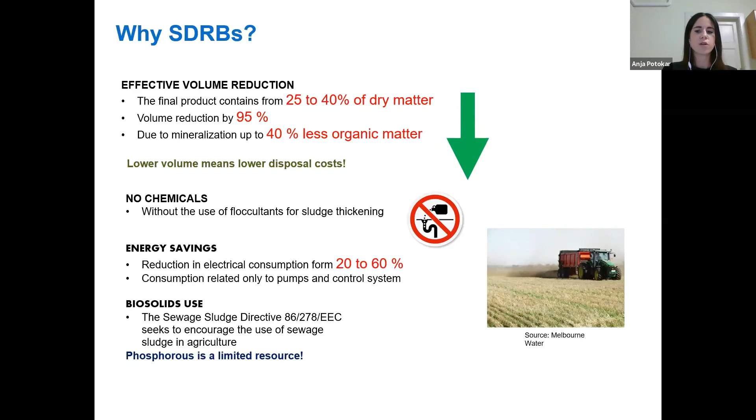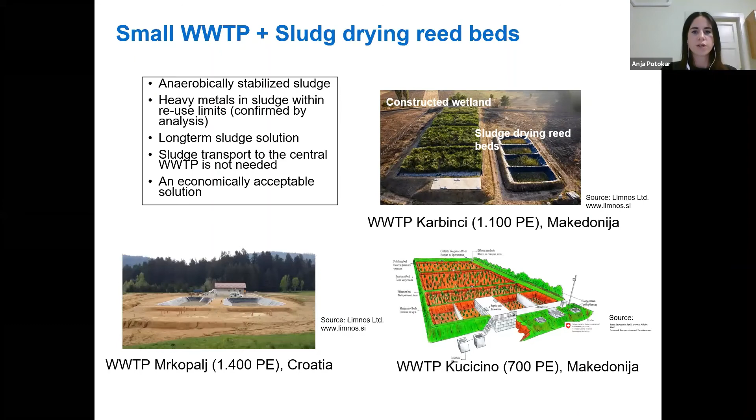So these sludge drying reed beds can be built both for small agglomerations below 2000 PE or next to centralized wastewater treatment plants. It's only a matter of economics and if we have enough space next to the centralized wastewater treatment plant. So here are examples of sludge treatment with the use of reed beds from the region. Here we can see a constructed wetland, and next to it are sludge drying reed beds.

So to conclude, I think I will just repeat what you already heard today, but nature-based solutions for wastewater are robust and simple to operate. Investments can be repaid through energy savings. And yeah, we're talking about a green solution. So we have some green space that also provides and supports ecosystem services, which I think now, when we are fighting climate change, is very important. So thank you.

Thank you, Anja. Maybe just a very brief clarification, because I can already see such a question being asked in the question section: what to do with, for example, wet tissues in the example of constructed wetlands. Actually, ahead of each constructed wetland, you need to have some kind of settling tank. Or in the case of Kaštel Labinci, we have a rotating mechanical filter, then a septic tank, and then we go to the constructed wetlands and the sludge. So there has to be some kind of mechanical pre-treatment, let me call it.

But a quick question to you, because there were claims made that, for example, in Scandinavia, this is not appropriate technology because of the cold. But as far as I know Slovenia, and I know Slovenia reasonably well, it's not a very warm place in the winter. And a number of your treatment plants are actually in the Alps, and they still work. So what about the cold, freezing earth, freezing soil, and operating constructed wetlands? Yeah, well, in Slovenia, the winters can be cold, like down to -10, for example.

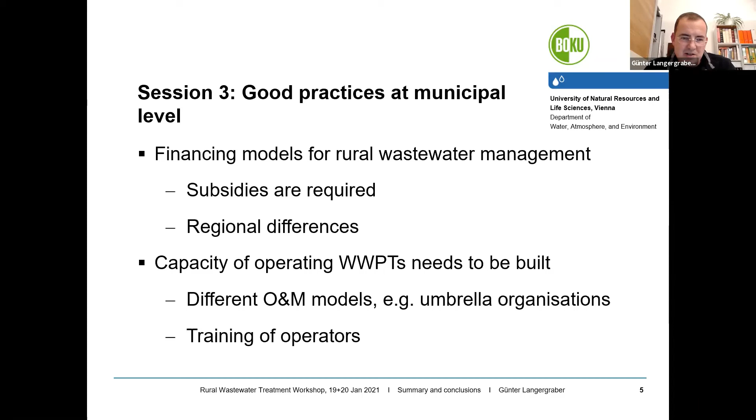And we heard about these umbrella organizations. This is quite an interesting model, I think, for a lot of other regions, where smaller cooperatives and other organizations could get support from a regional umbrella organization. The importance of capacity, the training of operators, was also mentioned quite a lot.

In the last part, we heard about different technical solutions. I just put here, we heard about IAS, we heard about small wastewater treatment plants, we heard about DEWATS. It's basically small systems to treat wastewater. So we have this conglomeration of different acronyms or different names for somehow the same thing.

We all know that for the rural areas, we must have technologies that are simple and robust, that are easy to operate and maintain. Design standards help to facilitate the implementation of the small systems. We heard this not only today, but also on the other days.

And just a reminder that the technology can be very simple, but if it's not operated and maintained, it is not working. So we need this capacity for operation and maintenance, and this is, for me, a very crucial point.

So just a few conclusions from my side, from what we have heard so far. I think one thing is that the importance of rural wastewater management is widely neglected. Also, there are areas, as has been shown in studies, where it has quite a significant influence on the surface water quality of these areas.

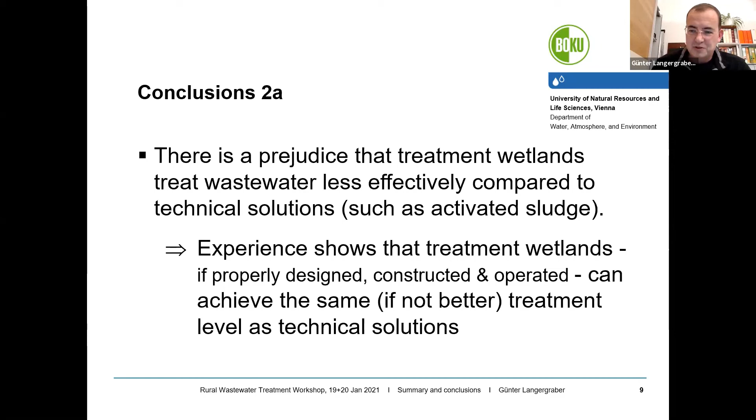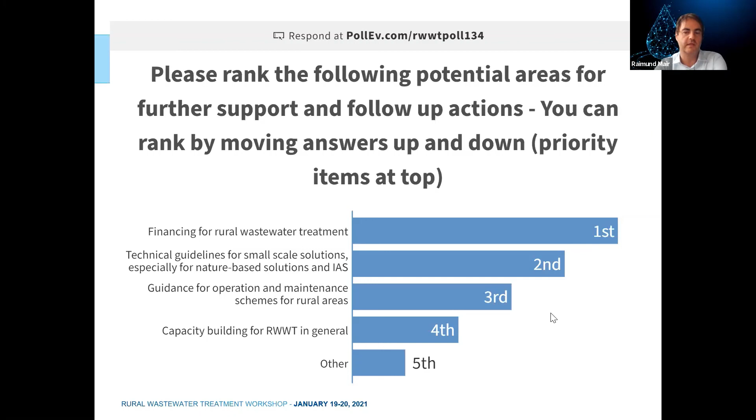Moving on to the next question, and as I mentioned already, this is an open question. What other topics should be considered for potential further support and follow-up activities more generally? So if you have any ideas, you're kindly invited to post your answers into Poll Everywhere. I've seen that some people ranked other follow-up activities also. So if you have specific ideas, and they're coming up already, sludge, cooperation, communication as a potential follow-up activity.

So please use this tool. Please add your thoughts. Sludge, second time already. Maybe the same person. Is it possible to post the same answer twice maybe? Nutrient recovery. So we see that ideas are coming in. Institutional environments to enable rural O&M. Management, which was also one point previously. Integrated water issues and local level wastewater is only one part.

Management models for the lower Danube particularly. Water reuse. Best practice examples, monitoring. So quite a range of topics. Support for cooperation. I just let you type in some further answers. Maybe quickly, can I turn to Günter? Do you have any quick reactions on the additional ideas which are raised? If you have any immediate reaction, welcome if you can share your thoughts.

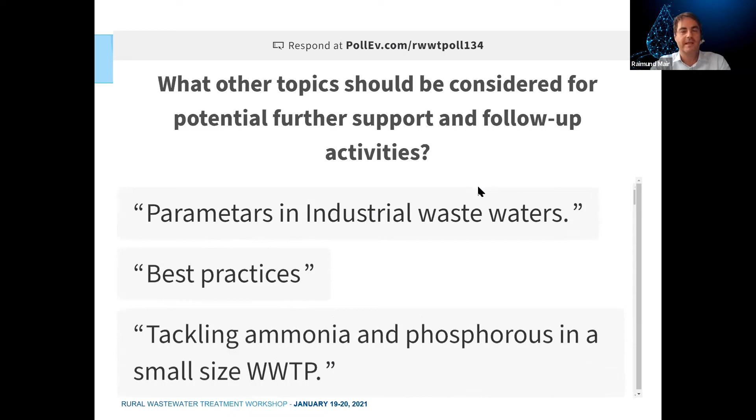Raimund, I'm just wondering how many extra workshops we need to organize based on this list. Yeah, this might a little bit extend our capacities, fully agree. So there will be a need for priorities, but I think it's always useful to get some feedback on what the audience thinks is really relevant in the practical challenges they are facing, and for discussing priorities for potential future topics, because the topic will remain relevant. I think this is also one main takeaway from my side. It will not be done with one workshop, but this is an issue which will take many, many years to be addressed. And therefore, I think this general feedback is very helpful in the frame of this exchange.

And it's also setting a good additional ground for topics to be handled through a potential next phase of the Danube Water Program as well. Fully agree, and of course also in the frame of the ICPDR. So I think the experience is certainly that this cooperation was extremely fruitful, and then we can try to prioritize where further activities might be helpful.

Fully agree. Now imagine if we are still able to do field trips. Fingers crossed, Stipe. Fully agree.